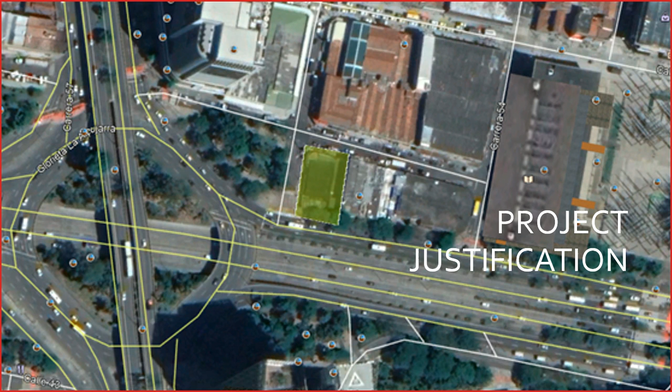For this reason, the mayor of Medellin has decided to carry out a strategic urban planning project where the emission of greenhouse gases is minimal, especially in the center of the city. As part of this project, the construction of a self-sustaining building is planned that is friendly to the environment, such that its emission of greenhouse gases is minimal and that complies with a three rating or certification system.

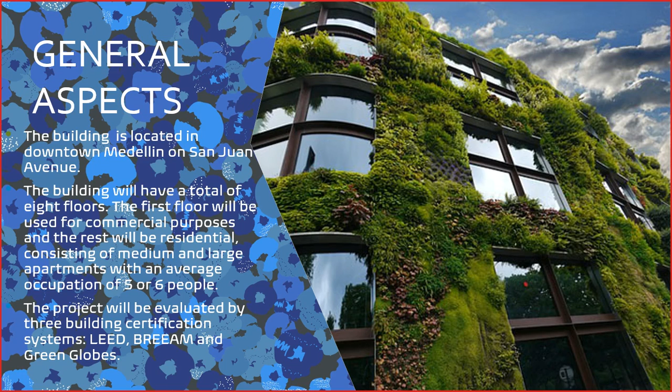The project design and construction is carried out using 3 building certification systems. These certifications are Green Globes, LEED, and BREEAM.

Second, selecting a rating or certification system. Green Globes certification: we decided to choose Green Globes because it is a new generation of environmental building certification, which is a science-based building rating system. This assures us that the strategies being implemented will contribute to caring for the environment and the development of a self-sustained building.

On the other hand, Green Globes certification has third-party assessors who interface with project teams and building owners in real time to create powerful partnerships. Thanks to the collaboration of third-party assessors, a better result is expected.

Additionally, the Green Globes certification program provides customized guidance in the design, construction, and operation of high-performance interiors and buildings. Another reason this certification system has been selected is that the Green Globes certification process ensures energy conservation, lower water consumption, responsible use of materials, and efficient use of project team time.

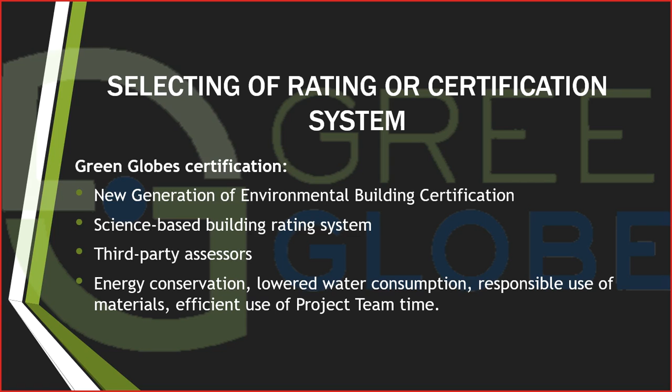In this way, building certification will verify buildings' sustainable aspects. Finally, the last reason Green Globes certification was chosen is that its assessment and eligibility requirements are consistent with the type of project to be carried out.

The second certification system is LEED, Leadership in Energy and Environmental Design. It is a voluntary, third-party building certification program that promotes the design and construction of more efficient, comfortable, and sustainable buildings. It's the most popular in the world, currently used in over 160 countries.

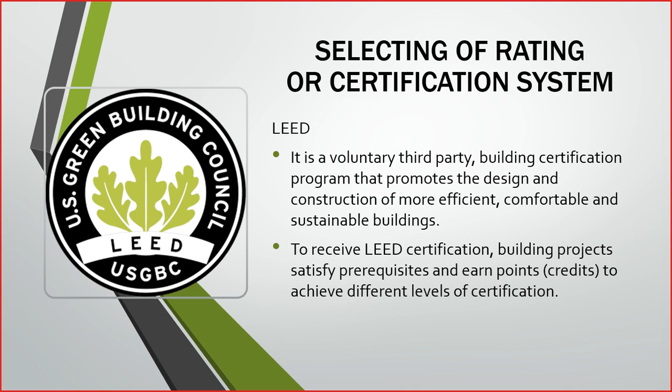To receive LEED certification, building projects satisfy prerequisites and earn points or credits to achieve different levels of certification. Our project is a neighborhood development (ND), which applies to new land development projects or redevelopment projects containing residential uses, non-residential uses, or a mix.

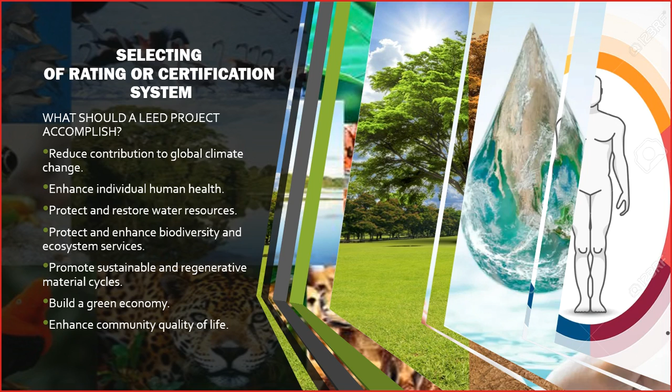What should the project accomplish? First, reduce contribution to global climate change, enhance individual human health, protect and restore water resources, protect and enhance biodiversity and ecosystem services, promote sustainable and regenerative material cycles, build a green economy, and enhance community quality of life.

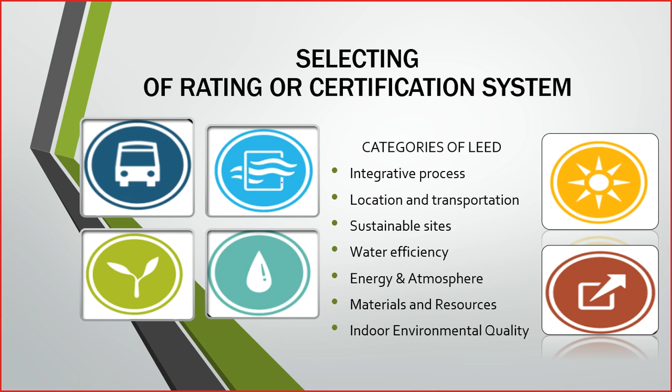The categories of LEED are integrative process, location and transportation, sustainable sites, water efficiency, energy and atmosphere, materials and resources, and indoor environmental quality. This applies to our project.

Another reason for choosing BREEAM was the extensive experience the brand has, being the first accredited entity in the world. Since 1990, it has been a leader in environmental certifications for new buildings and projects, as well as in management, restoration, and maintenance processes.

The categories that are measured are energy, waste, water, materials, land use and ecology, and management.

Project description.

According to Green Building Initiative 2019 for Green Globes certification, projects must achieve 15% or greater project energy consumption savings through one of the following options: first, Energy Star; second, EUI reduction, demonstrating the proposed design targets a 15% or greater reduction of energy use intensity compared to the national median energy use intensity. For this project, option 2 was selected.

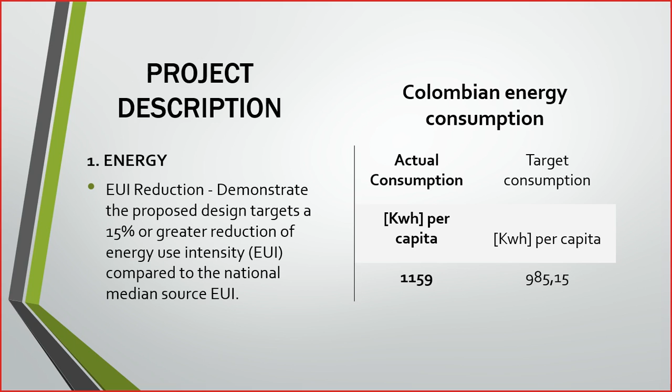Considering that Medellin is in the Andina region, it has a solar energy potential of 1,550 to 1,750 kilowatt hours per square meter per year. This means that by installing enough solar panels, the demand for energy consumption could be satisfied.

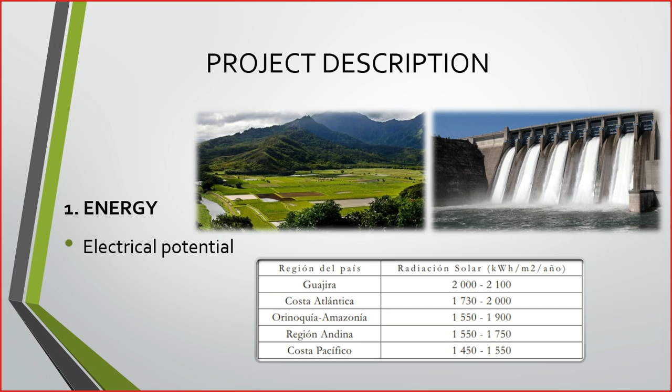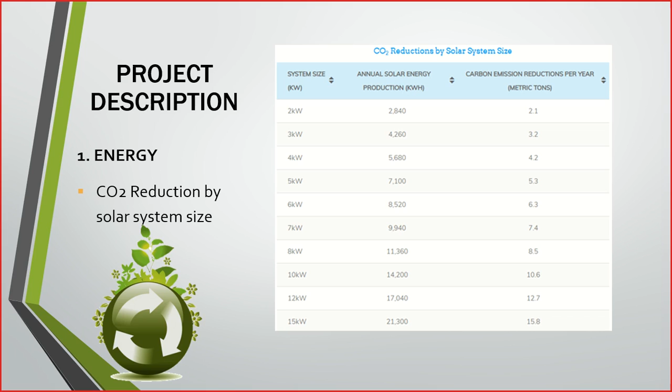But not only does the use of solar panels contribute to energy savings. According to Energy Sage, installing solar panels also improves the environment and reduces greenhouse gas emissions. The table converts solar energy production into greenhouse gas offsets using the respective metric converters. This shows that solar panels are a good tool to obtain renewable energy, reducing the carbon footprint, resulting in a self-sustainable and environmentally friendly building.

According to BREEAM, new construction must minimize energy consumption through proper design, thus reducing CO2 emissions. BREEAM not only verifies that energy consumption has been reduced, but also that greenhouse gas emissions are being reduced, considering that the self-sustainable building planned for the project will obtain a large part of its energy from a renewable source such as the sun. This will guarantee that the emission of greenhouse gases such as CO2 is reduced, thus reducing the carbon footprint.

Additionally, the BREEAM certificate requires measurement and control of the energy the building is consuming. For this reason, and according to an idea already being implemented in the most ecological building in Spain, located in Alicante, it has been decided to implement a centralized management system which allows control of energy consumption and cost. It has also been decided to install wind turbines at the top of the building to obtain renewable energy from a different source.

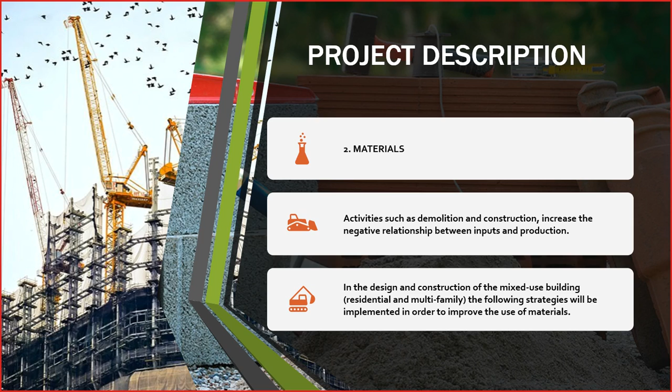Recycle and reuse: during the demolition of buildings, construction and demolition waste (CDW) is generated, which is often a valuable resource such as steel, aluminum, stone, concrete, brick, ceramics, and wood. These materials can be identified, separated, and reused. This waste is a factor in the environmental and landscape deterioration of the region, not strictly because of its composition, but because of inadequate management by the generators, which affects public space and environment.

Among the recycled materials, plastic can be used to make lightweight dividing walls, especially in the residential area of the building.

Transportation: with regard to transport, it should be borne in mind that long distances produce more pollution, so it's necessary to obtain resources locally or from areas close to work sites. In Medellin, there are several companies such as Materiales del Titán, El Portón de la Construcción, Col Cemento, among others. In addition, there is Greco, recognized for the sale of recycled granules transformed into sand, rubble, and concrete, among others, allowing their reintegration into the construction process.

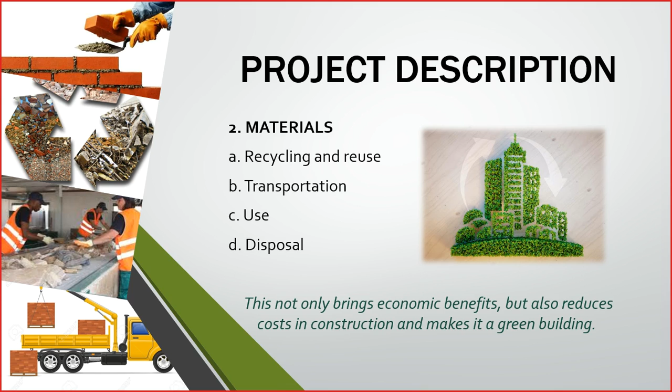Disposal. Construction and demolition waste (CDW) must be disposed of in places indicated and regulated for such use. As far as possible, it should be reused in other projects or even in the same building.

Next, land use and ecology. This category refers to land use not only from a functional point of view, but also from an ecological point of view. These categories encourage the sustainable use of the land and the protection of the habitat around it. Furthermore, it places special emphasis on the mitigation, protection, and management of biodiversity and ecology in the long term. This category has three items.

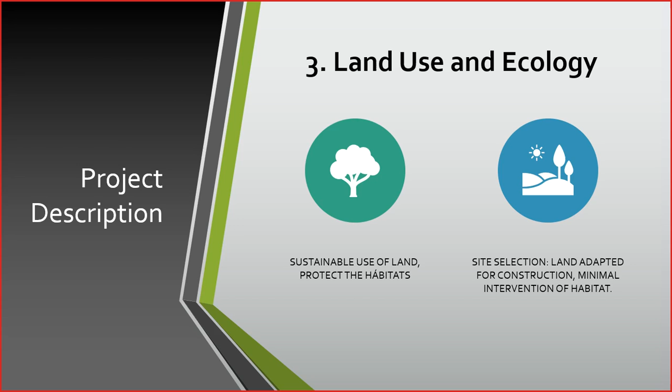The first one is site selection. This item evaluates the selection of the site where the project will be carried out and executed. This includes the state of occupation or contamination in which the space is located, and mainly promotes the use of previously occupied spaces which are in a state that facilitates their occupation or use. In our project, a land that was already adapted for construction and planned uses was chosen, which does not represent any intervention that endangers the natural state of the space or affects the biodiversity and ecosystems around.

The second item is the ecological value of the site. This criterion refers to the protection of wildlife found in the area to be intervened, as well as the protection of its ecological characteristics. This protection must be present from the moment of preparation of the space until the completion of the construction and execution of the project. For the execution of our project, this criterion does not have a substantial effect due to the fact that the project execution space is not located in a rural area.

And the last factor is long-term impact on biodiversity. This item seeks both the protection of the biodiversity of the area and the minimization of the impacts that the development of the project will bring in the long term, prioritizing the conservation of the biodiversity of the area. The green facade to be implemented in the project, as well as the gardens in the residence area, will provide a natural environment for different animals such as birds.

Project management and integrative process. In the design, planning, and construction of a project, several professions are involved, and each can support and contribute in its own way, with creative ideas focused on sustainable development through the project.

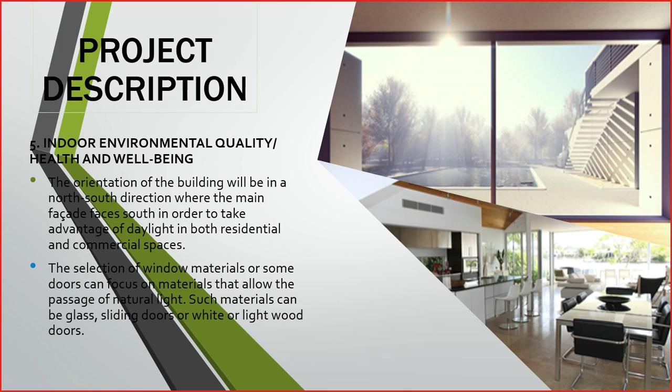Next. Emissions. According to Carlos Duarte 2020, the emissions produced by the different building equipment, such as heating, must be controlled. In this way, it seeks to minimize the ozone depleting potential and global warming potential.

First of all, it has been decided not to use equipment such as heating, which consumes a lot of energy and generates emissions. Thanks to the green facade, green walls, and the green roof, combined with a building design that allows adequate ventilation, the temperature inside the building will be comfortable and heating equipment will not be necessary.

With the prohibition of equipment such as heating and the green strategies mentioned before, it will be possible to reduce the ozone depleting potential and global warming potential. The global warming potential is defined as the climate change potential of a chemical substance compared to 1 unit of CO2, the main greenhouse gas.

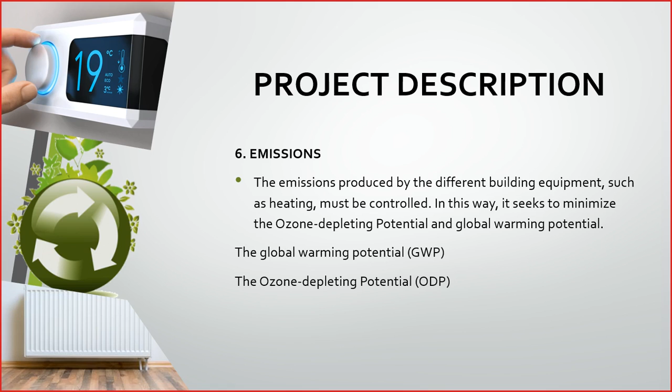The ozone depleting potential is defined as the ratio between the relative amount of degradation of the ozone layer caused by a specific substance in relation to the depletion that is calculated due to the CFC-11 reference gas, which has an ozone depleting potential equal to 1. Next.

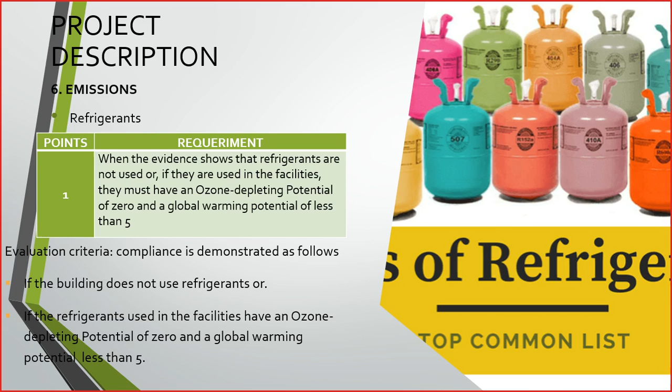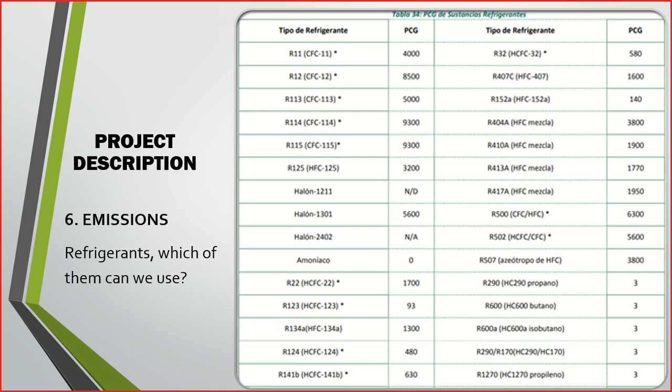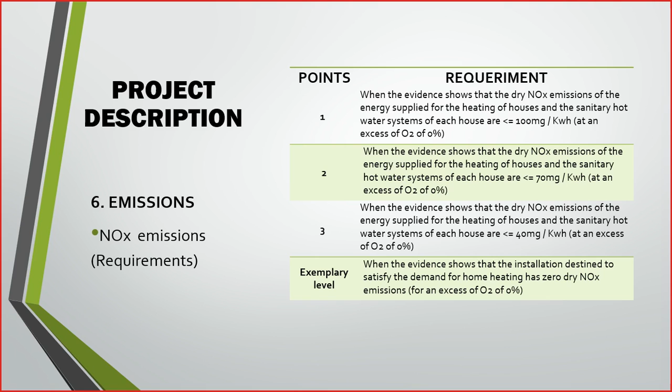According to BREEAM, the building must meet the following evaluation criteria: when the manufacturer's data show that the domestic hot water and heating supply systems of each home have dry NOx emissions levels for an excess of O2 of 0%, in accordance with the levels compiled in the table shown.

Second, exemplary level criteria: an extraordinary point can be awarded if the manufacturer's details show that the installed plant intends to satisfy the heating demand of the building's dwellings, with 0 dry NOx emissions for an excess of O2 of 0%.

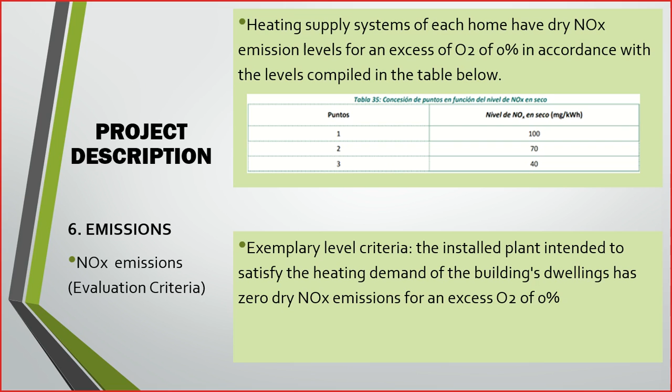Transportation. It's not a secret that much of the air pollution comes from mobility, and this is the case of Medellin, since according to IDEAM, the area where the project is located is the one with the most air pollution particles. So it is suggested to take into account the following characteristics of transport to minimize impact.

Minimize use: according to the Registro Único Nacional de Tránsito, Medellin is the third city with the largest number of cars in Colombia, but has the highest annual growth rate at 5.7%, indicating that although it encourages alternative transportation, it's also the city where more cars are purchased annually. Taking this into account, a plan will be implemented at the building to discourage car use, minimizing to a high degree the amount of parking in the building.

First, encourage the use of bicycles. Despite having one of the highest rates of road insecurity in Latin America, according to IDEAM, Colombia is the country of cyclists, which allows society to take an interest in this type of transport. In a city like Medellin, where large economic contributions are made to road infrastructure, plans can be implemented as an incentive for this type of transportation, not only to reduce pollution but also road congestion and improve the city's vision. The building is located in the center of Medellin, which currently has bicycle path coverage that can be extended to the streets surrounding the infrastructure, benefiting residents and visitors to the commercial area.

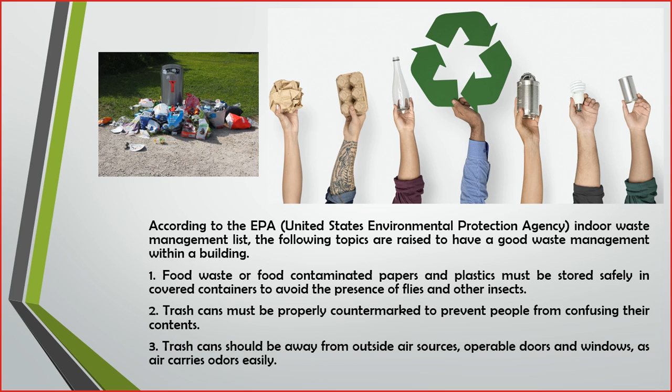Third, separation at the origin. To make effective use of this plan, it must be focused on recycling from the beginning. Therefore, the inhabitants will be required to make selective separation from home. This in order that when waste reaches the storage room, these are already separated by type of garbage, optimizing the time spent on these tasks.

Fourth, selective collection. Hand in hand with the state's entities in charge of waste collection, work will be done on the way in which garbage is collected, so that as much garbage as possible can be recycled.

Fifth, improvement of the infrastructure. As mentioned at the beginning, the EPA recommends adequate infrastructure so that the garbage is in the best possible condition, including a stable temperature without access to outside air, and ventilation that helps to eliminate odors. Include clean air ducts and security doors and windows throughout the building.

Sixth, use of waste. As is known, a large amount of discarded materials can be used in multiple tasks. Therefore, it will be of vital importance that the largest amount of discarded materials is used and reused in order to reduce the environmental impact.

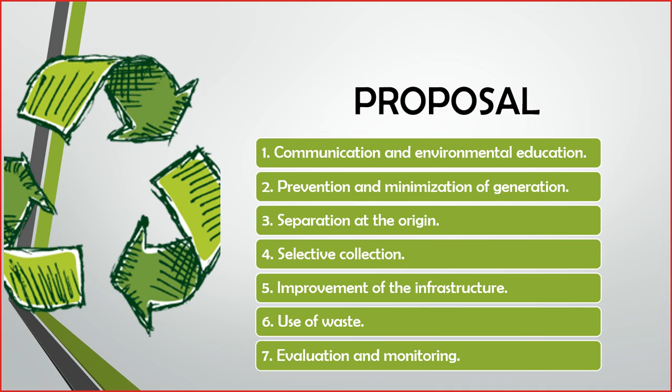Seventh, evaluation and monitoring. Finally, it's considered important to constantly monitor the practices that are carried out. This in order to have control from month to month and thus be able to make decisions about practices that should no longer be done or new practices to implement.

Water management. In the water category, the main aim is to optimize the use of the resource, seeking to guarantee responsible consumption, generate the least amount of loss possible, adopt new use for the water generated within the building, minimize the generation of greywater with environmental impacts, and take advantage of rainwater for a new use within the building.

For the collection and distribution of water, the building will have a system of pumps and an auxiliary tank to guarantee 24-hour water service and also guarantee a 24-hour service in case of any damage to the aqueduct, according to the Colombian Technical Standard NTC 1500.

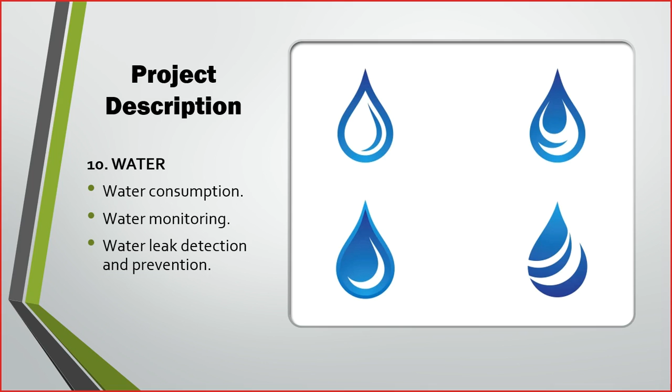This category has three items: water consumption, water monitoring, and water leak detection and prevention. The first one is water consumption.

This implies an intelligent way of consuming the least amount of drinking water possible without generating waste and taking advantage of alternative sources to make use of the resource. Intelligent consumption will be achieved with the implementation of sanitary devices that use less drinking water for their operation, as well as with the reuse of greywater.

Greywater is defined as wastewater that comes from showers, bathtubs, and sinks which have a low content of fecal matter. Due to the high demand for drinking water in residential and commercial buildings, as well as the high generation of greywater, the implementation of the water generated by the same building in bathrooms and gardens is an ecologically viable option.

The correct reuse of this water will help significantly in reducing the consumption of drinking water, since this water can be put into operation for toilet discharges.

The second is water monitoring. Another aspect to consider regarding water consumption is its management and control. The building will have a meter on the first floor with a clear detailed record of consumption throughout the building, as well as sub-meters for devices that demand more than 10% of the consumption of the entire building.

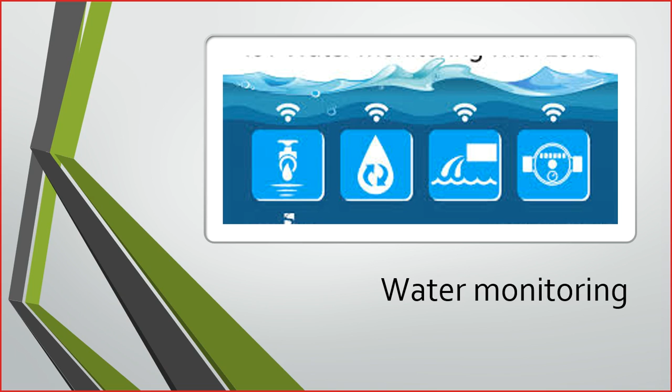This seeks to be able to have control of how much water is being consumed, in which appliance it is being consumed, and also to be able to monitor loss or failures in the pipe network. In addition, different protocols will be carried out for emergency or damage cases to ensure efficient repair without compromising service or generating waste. And the last one is water leak detection and prevention.

This criteria seeks to carry out a diagnosis in the pipe network capable of detecting water leaks which in the traditional way cannot be detected, compromising not only the waste of the resource but also the efficiency of the network. For this, the building will implement registers and controls capable of detecting irregular variations in the direction and the speed of the flow, which may represent some damage, leak, or plugging in the pipes.

In the commercial area, flow control devices will be implemented to regulate the demand in different devices such as toilets, sinks, and others. These flow controllers will not only regulate the demand but will also act as regulators in the detection of leaks in the system, operating in the exclusive network of the commercial area.

For residential floors, at the entrance to the laundry areas and bathrooms, as well as in different sanitary devices, isolation valves will be installed to prevent leaks and, in case of repairs, to be able to isolate the area to be intervened without compromising water service through the apartment.